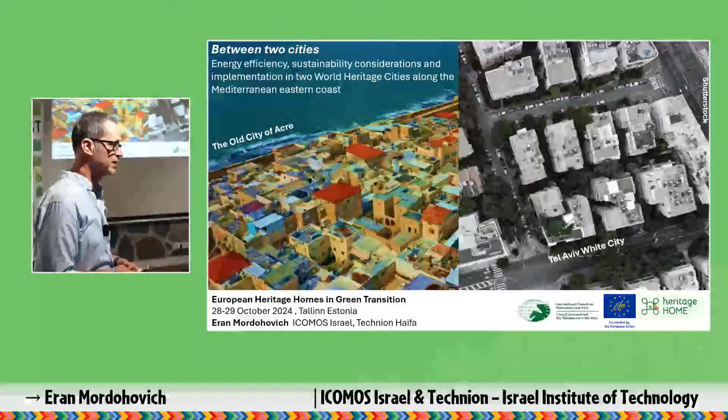I have to say I'm not an expert on climate, I'm an architect. During my work I'm working on archaeological sites and archaeological heritage management in the north of Israel, so normally it's not the consideration of climatic issues. But within my position, I'm also kind of representing this governmental organization. In the old city of Akko, we have a conservation committee because it's a World Heritage City. Part of the management plan of the city was to establish this committee, and I'm representing the interest of archaeology, but also dealing with heritage management in this city, which is very interesting, very difficult, very challenging.

And by that, the issue of, let's say, energy installations in a heritage city like Akko came up already to our committee, and then it started to get in my mind that we really need to address this issue before it becomes a concrete problem, because the dynamics in Israel in general, and particularly in Akko, is that people are doing what they think they need or want or should do. They don't wait for the authorities to authorize or give them permits. Sometimes they do, but mostly they just do.

And then I think in this kind of environment, we have to prepare, and we have to think what would be possible within this kind of question about installing, in this case, photovoltaic - you called it solar cells. But the title of the lecture is Energy Efficiency. So I learned something, it will come.

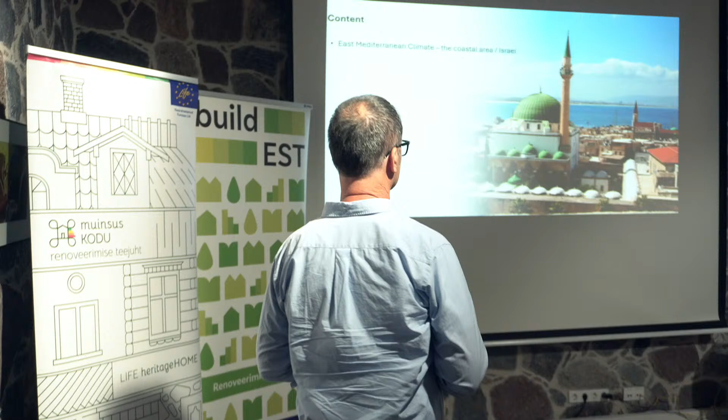So I will speak a little bit about our climate. What I will do, I took Akko as one example, and Tel Aviv. Both cities are on the coastline of the Mediterranean, and they are in many ways two extremes in terms of culture of building, in terms of social, demographic, economical structure. The difference is very big, but the climate is common, and we're talking about two completely different kinds of architecture. One is vernacular and the other one is modernist, both World Heritage cities. So I thought this comparison might be interesting.

So I will speak also a bit about Mediterranean vernacular architecture, present the old city of Akko and its climatic characteristics, the white city, its values, and talk a little bit about the climatic history of this kind of architecture. Then discuss a little about Tel Aviv, about Akko, about the challenges we have there, mostly about anticipation for photovoltaic panels, and then a little bit thinking about the future. I've learned a lot during the 2 days, so I tried to adjust my talk to what we have discussed, and I also have some points for discussion at the end, so I hope we can have some insights from you about the questions I have.

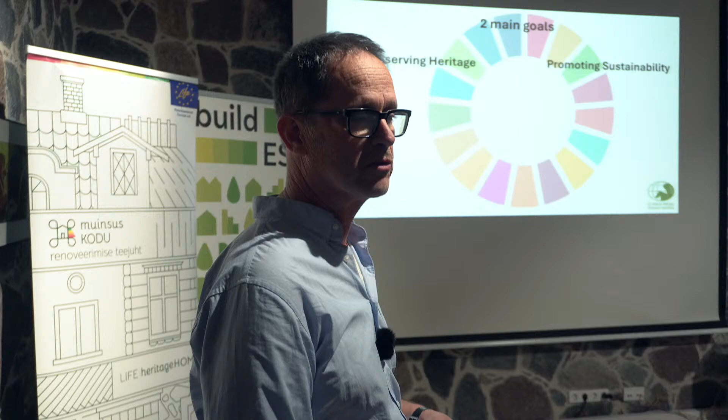In this audience, we don't need to speak too much about the conflict between preserving heritage and promoting sustainability. It's a kind of built-in conflict in many ways, but we understand it may also be possible. Maybe this conference is part of how to put those two together. It's part of the UN SDGs: affordable and clean energy, sustainable cities and communities, and climate action. So these three goals are at the core of this discussion.

A little bit about the climate we are talking about. We have been here in the northern area, and I'm talking about a completely different climate. Israel is in the Mediterranean, around the 30th latitude and a little bit above, until the 33rd latitude. So we are bordering desert climate already. Israel is a very small country, but it has quite varied climatic zones, from desert to semi-alpine in the north, coastal and subtropical.

But I'm going to talk about our climate: hot, dry summers, very long summers, and they are getting longer and longer, with mild, wet winters. Wet is almost wishful thinking, because they're getting drier and drier too. We have less rain in winter, and sometimes strong rains in the mid-seasons. But this is the basic weather we are dealing with: hot, dry summers, and on the coast, very humid. There is huge humidity coming from the Mediterranean, and that will affect the discussion.

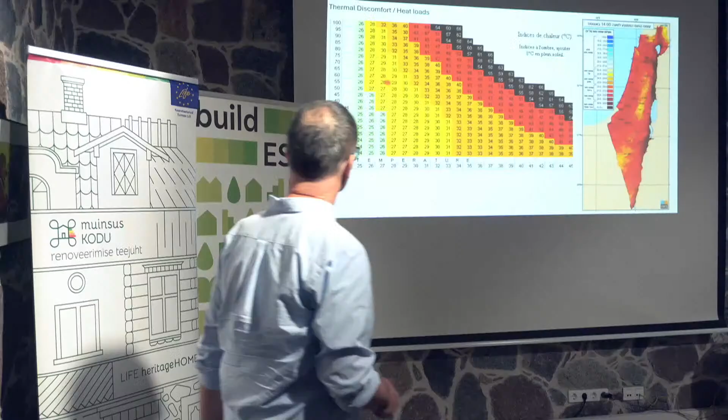So this is the thermal discomfort or heat load, which takes into consideration the temperatures and also the humidity, and this combination determines how comfortable you feel. In the range we're talking about, summers in Israel are already around 32, 33, 30 degrees, and on the coastline, the humidity is something around here. You can see the colors getting closer to orange and red, which means it's not an easy feeling.

This is one of the things vernacular architecture had to mitigate in the past, but also what do we do with that today, and how modernist architecture tried to mitigate it. And this is getting worse and worse.

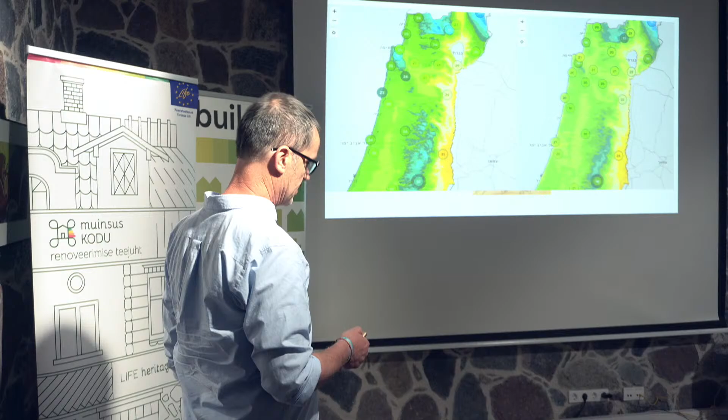Those are temperatures along the coast, so you can see - I think this is summer, this is winter average, and this is summer average. But for me, those numbers look a little bit low. I think they are much higher, for sure with humidity.

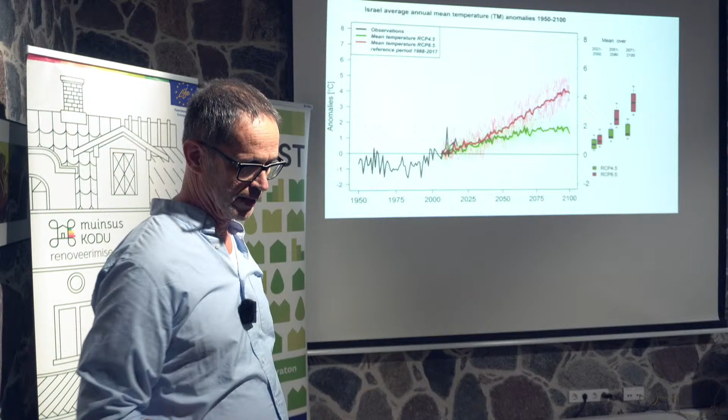This is the world, talking about what will happen in the next 70 to 80 years. So today we are somewhere here, and in the best scenario we're going to get to 2 degrees warmer in Israel, and in the worst scenarios, we're going to get to 4 degrees more than today, which means everything we feel is hard today will be much harder, and maybe sometimes unbearable.

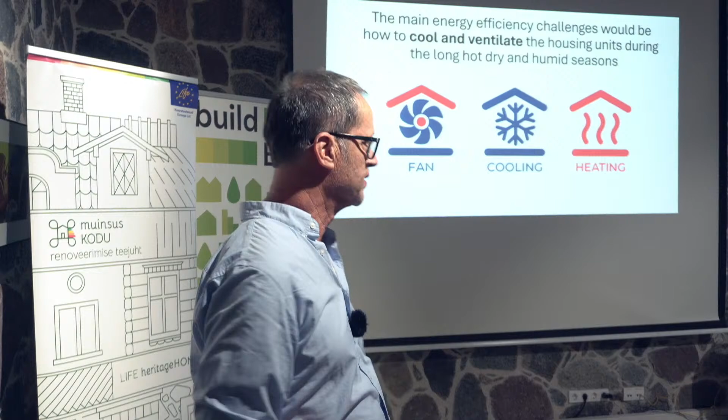So the main challenges we deal with in Israel, or in our region, are about cooling and ventilation. It was also very interesting to learn about this concerning your region. So it's about ventilation, cooling, and a little bit about heating, because, as I said, winters are becoming shorter and milder.

So this is actually the picture that we should try to mitigate. I accept your remark that it's not about cooling or heating—it's more about comfort.

A little bit about Mediterranean vernacular cities—referring to Akko, but also to many cities around the Mediterranean, mostly in the southern and eastern part, but also cities in southern Europe. It starts with a compact urban layout, which influences the climate within those cities and within the houses. First, urban structure: narrow streets and alleys, irregular patterns, so you don't have very big sun radiation in big streets, courtyards and patios, terrace buildings and streets, and structure adapted to social and religious traditions.

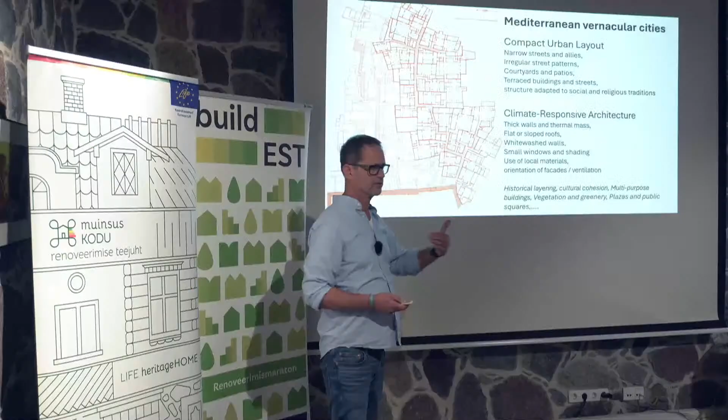So this is the idea that there is a certain level of moving from the public into the private. It goes well with the architecture and with the climate, but it also influences the urban layout.

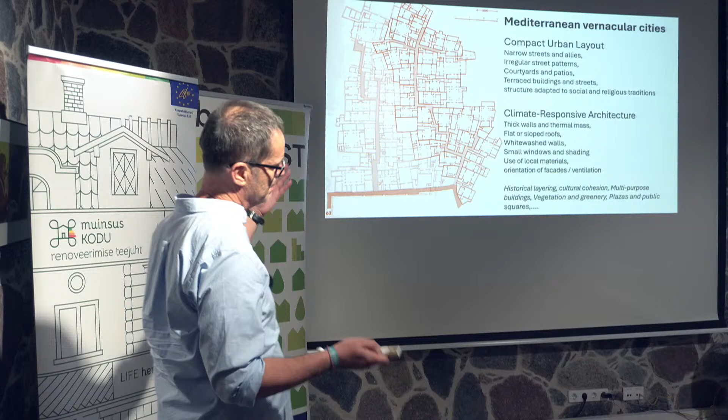And regarding climate and architecture, we have thick walls—this is also part of the way people used to build before they had other technologies. Flat or sloped roofs, but sloped roofs are more scarce. Whitewashed walls—they're not always truly white, but light colored. Small windows and shading, that's obvious. The use of local materials, which fit the climate, orientation of facades, and ventilation, which we talked about. There are many more things, but this isn't a lecture about vernacular Mediterranean cities.

But those things, I think, are part of the way we should look at the climate issue.

So the foundations of the city we know today, the old city, are actually from this period. Later on it was conquered by the Mamluks, by the Muslims, and was neglected and left for ruins for 300 years. Then in the middle of the 18th century, one of the local rulers rebuilt Akko because he understood the economic potential of this city as a port—it was the only natural port along the eastern coast of this country.

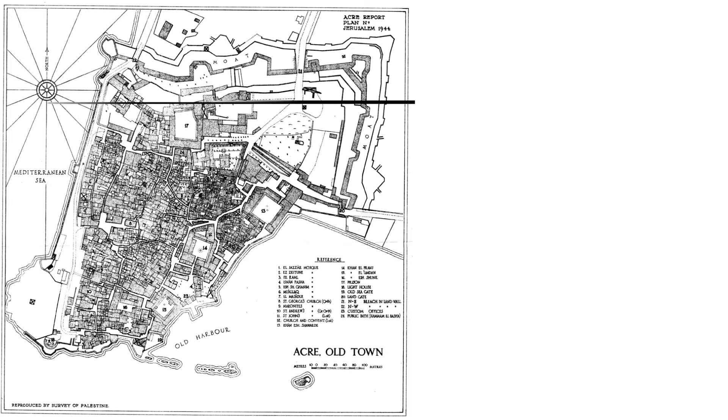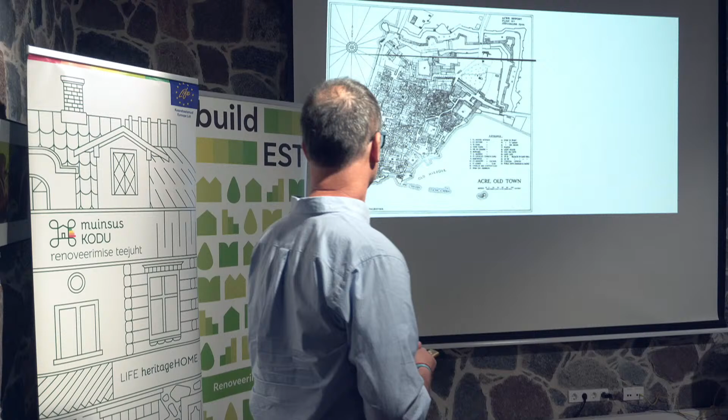It's actually a sandstone mixed with all kinds of shells and things, and it's a very porous stone, so it takes humidity in with salts, and if you don't let it evaporate, then the stones break from the crystals. Therefore we have this issue of breathing of the plasters and of the stones, and this is one of the things we have to explain to the local people today.

They are not masonry people, so they don't understand this logic, and they use cement, etc. What is interesting to see is the structure of the streets, which mainly go north-south. This north-south direction in our region is a very important feature in cooling down those main streets, because the sun mostly hits from the east and then from the west. At noon it's above, but it's easier to shade, so this orientation is very important, and it repeats afterwards.

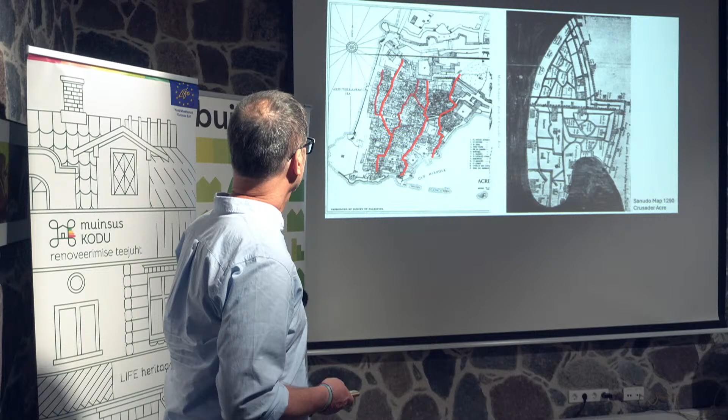Then we have a kind of typical living neighborhood, and you can see how many patios and inner squares there are, or there were. This is a British map from 1944, which was adopted. What is also interesting to see is that in the map of Sanudo, which is the first map we have from Akko, St. John the Acre, whatever name you want to call it, we can see that this structure of streets is still there from medieval times.

There are around 5,000 residents in the old city, and 95% of them are Arab Muslims. It's very important to say this because it also says a lot about the socio-economic status of those citizens and their ability to handle World Heritage demands, understanding those values, and investing in it. It's very low on the socio-economic grade scale in Israel, so it's 3 out of 10.

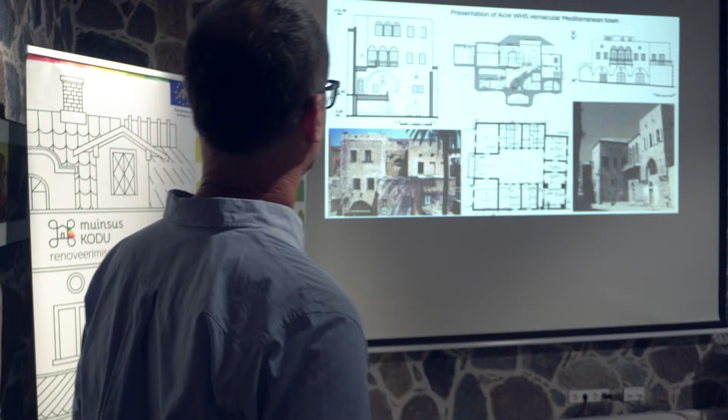I mention the electricity because it's all from the national grid, and there are a lot of illegal connections and improvisations done by the people themselves. So the reality is—I'll go back to it afterwards—there's a conflict between the residents and the government and the municipality, which is part of the discussion for me.

This is typical housing, or vernacular architecture, with living units built around an interior square, court, or space. We normally have a ground floor which is very high and vaulted, and in the past that used to be a courtyard. Then they closed it and put merchandise or animals on the lower floor, while the families lived on the upper floor, and sometimes there is a third floor.

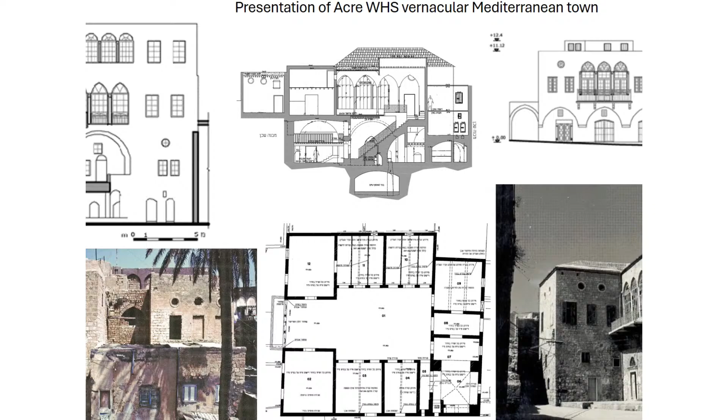So what can we say about climate challenges? First we have a division of high ceilings—high ceilings let the heat accumulate in the upper part and be ventilated out. But since 1948 there were a lot of Arab refugees moving to Akko, and there started to be a huge housing problem.

So instead of the air going up, people divided this one big high unit into two units, with a floor in between, and windows up and down. The big beautiful window that used to be there is now completely gone and blocked. So the whole circulation of air changes within this, and we see this phenomenon a lot in Akko.

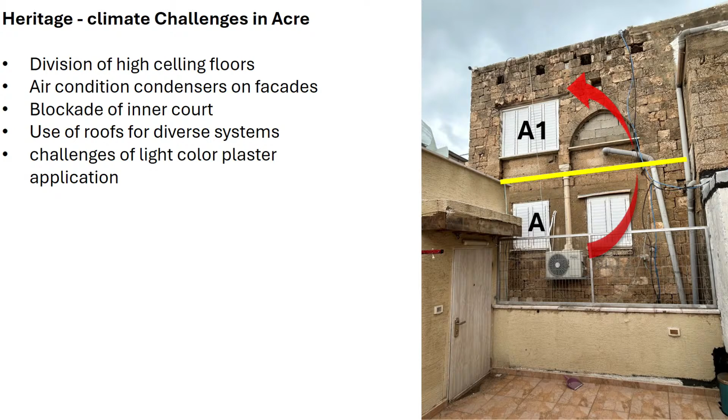So we have the air condition condenser on the facade. I have to say something—air conditioning is a must in a way, it's very difficult without it. I think we need to find ways to air condition or cool the houses.

It was mentioned today with green energy, energy that is not fossil. But it will be very difficult in Israel. Maybe you, as a tourist, went to those areas or worked there—it's very difficult in the 21st century to live without it. It's a fact, I think it's very difficult.

Coming from the subtropics, I know what you mean, but the problem is it heats as well—it's heating the public realm. Yeah.

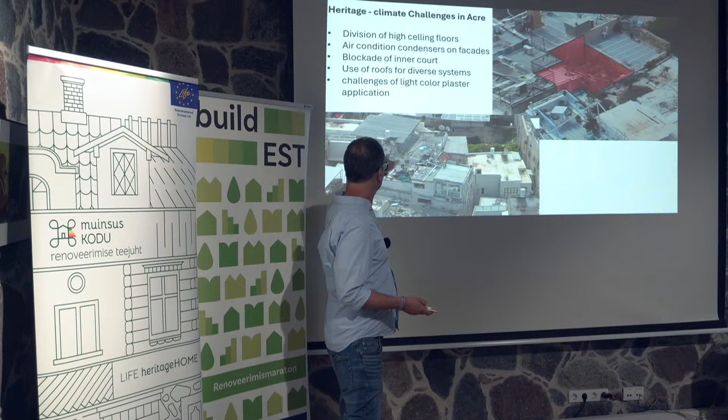The other thing we have to find is a way to deal with not just the energy we're using, but also the heating from these systems in tight urban environments. It's difficult. We have air condition condensers which are disturbing, and inner courtyards which were blocked with all kinds of agglomerating and extending of small apartments. The roofs are being used for many things: garbage, boilers, condensers, whatever. We'll speak about it later.

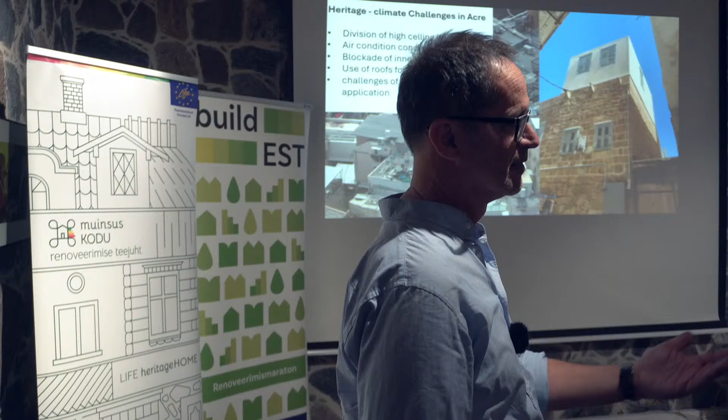And also the question of the plaster. In the past, Akko used to be a plastered city, rendered with lime plaster. But today almost none of the houses in Akko are plastered. This is an addition we let them do, but we force them to plaster because it's made out of light materials, so we don't want to see those materials, and we're allowed to do it because of the weight. But the buildings aren't plastered because plaster needs maintenance, and maintenance isn't something that's done, at least in our region. The physical conditions with the salt and the lime aren't always suitable, so it's very difficult to find a good render. If they render, they put cement inside, and we know what's the problem - it doesn't breathe. So we prefer to have the stone breathing than to have cement plaster.

I jumped to Tel Aviv, again a World Heritage City, but from a completely different period. It's a modernist city on the Mediterranean coast, about 150 kilometers south of Akko. It started as a neighborhood outside of Jaffa. Jaffa was a city with a small port, one of the main ports, and it was mainly an Arab city. Tel Aviv started as a neighborhood, and then it developed - it started in 1909, so it's a bit more than 100 years old. But Jaffa is again 6,000 years old.

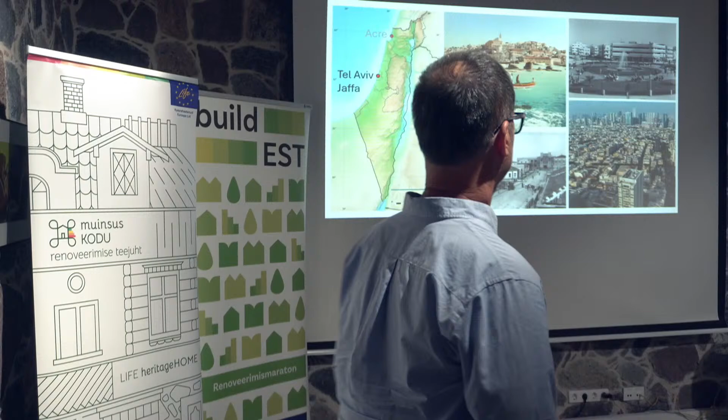Then in the 30s, with very big immigration from Europe of Jews, it grew and became really the powerhouse of Palestine at that time. They say it's the first Jewish city, the first Hebrew city. Today it's a city of almost 500,000 people, but it's in the middle of a metropolis of about 2.5 million people. Economically and culturally, that's the capital of Israel, not Jerusalem, as many European countries think.

This ugly building, or not so beautiful building, is where the Estonian embassy is located. Therefore I put it in. And actually, from inside, you have a very nice view of the white city of Tel Aviv, the World Heritage Site, and the sea. So I wanted to give the Estonians a little bit of information if they come to Tel Aviv - that's where your embassy is.

You can see quite nicely how Tel Aviv, the white city, which is a protected area, is being surrounded by towers. In the beginning, when Jewish architects came to Palestine at the turn of the 20th century, they tried to look for, let's call it, Jewish architecture which resembles the Jewishness, but also tried to get ideas about how to build in the Mediterranean, Middle East climate-wise.

So they used all kinds of features taken from local craftsmen and local architecture. Those upper buildings are not from Tel Aviv, but I brought them because of the architect - this is the first building of the Technion, where Ruth and I are teaching, but it's now the National Science Museum. The houses below are houses in Tel Aviv built in the early 20s or a bit before, in a very eclectic style, when Jewish architects tried to search their way to what is suitable for the Mediterranean climate, but also for the new nation building itself.

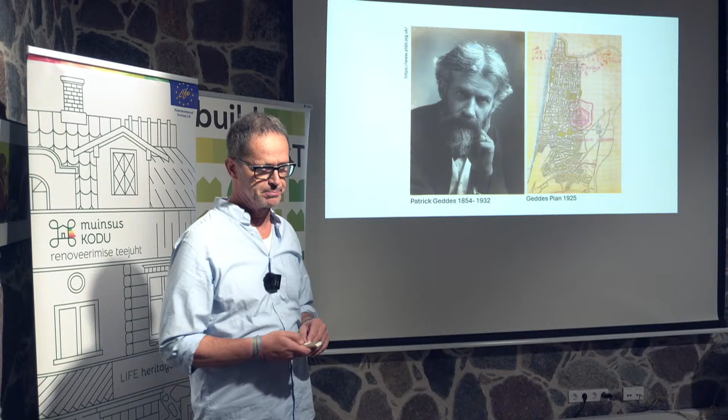At that point, in the early 20s, Patrick Geddes comes into the picture. Patrick Geddes, a Scottish botanist and biologist, had a lot of influence on urbanism. At that time, he came with ideas from the Garden City, and he had his own ideas. Geddes was appointed by the Jews - he came to Palestine from the 20s, and he advised Jerusalem and Haifa, but Tel Aviv invited him to do this plan, which, as I read, is the only plan of Geddes that was really implemented at such a scale. His plan is actually, until today, the core of historic Tel Aviv.

But Ruth is here, and she's much more expert on Geddes than me, if she would like to add.

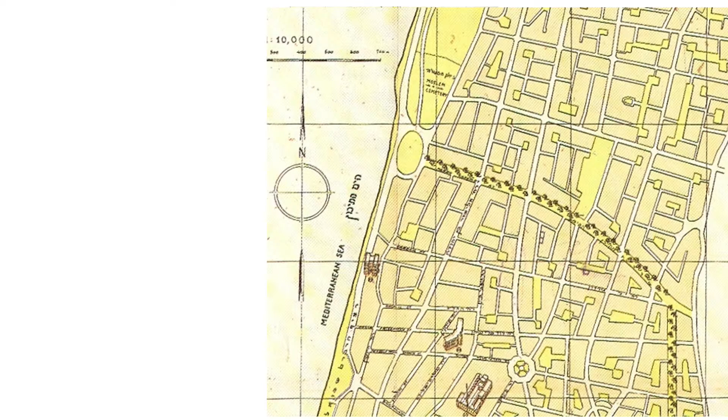This is a Geddes plan that started to develop. The ideas were very clear, with building blocks and green areas inside the block gardens, and the direction of the street. But the municipality of Tel Aviv later, due to pressures to build and densify, have changed it. But the basics are actually there, and Geddes has taken also the direction of the northwest winds, which are the typical cooler winds in the summer, as a kind of direction for the street.

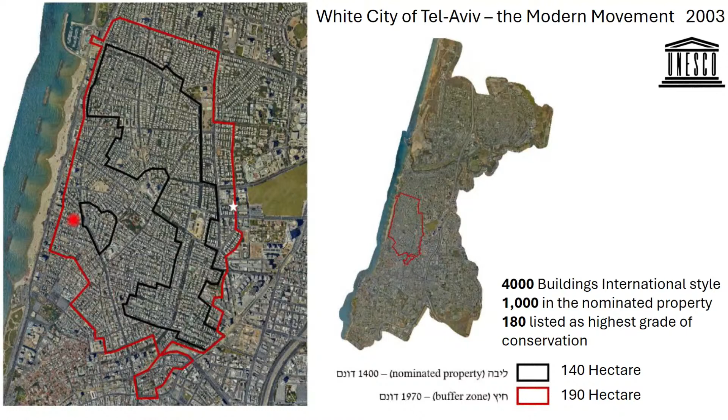A little bit about the World Heritage Site. This red area is the buffer zone of the White City, declared in 2003, one of the first Israeli sites. The black is the declared area with this kind of enclave here. So we have about 4,000 buildings within this area in Tel Aviv of the international style. 1,000 of them are in the nominated zone, the black one, and only 180 of them are listed with the highest grade regarding conservation.

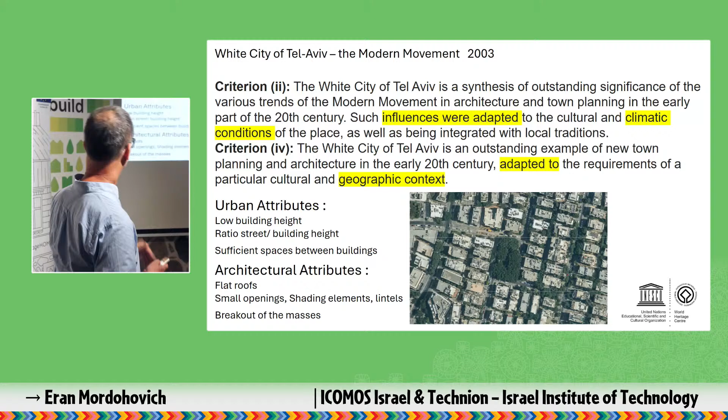Also in Tel Aviv, the criteria were referring to climatic adaptation. They said that influences were adapted to climatic conditions of the place, and also the architecture of the early 20th century adapted to the requirements of the particular geographic context. We can see that by the initial thought about low building height, the ratio of the street and building height, and sufficient space between the buildings to allow ventilation. We have also flat roofs and small openings, shading elements, lintels from the south to shade, and the breakout of the mass, which is also climatic, but it comes also from the ideology.

Some of the buildings as they were in the 30s mostly and 40s. This is one of the Vogue covers with this iconic building, so the whole architecture was very iconic and became also kind of hip, for sure for the Tel Avivians, but Israelis too, and also in the world. Tel Aviv, until the wars that we are having now, was quite an interesting destination for clubbers, gays, and tourists, architecture tourists also.

There's some pictures of the buildings as they are today, some with additions. I will talk about the additions, but those are not with additions. The White City was actually, a new style was created there for modernism, influenced by other modernists like Le Corbusier, like the Bauhaus school. You should know that most people call Tel Aviv the Bauhaus city, but it was not built only, or mostly not, by Bauhaus graduates. But that's a common mistake. It's already branding of the city, so it's hard to resist it.

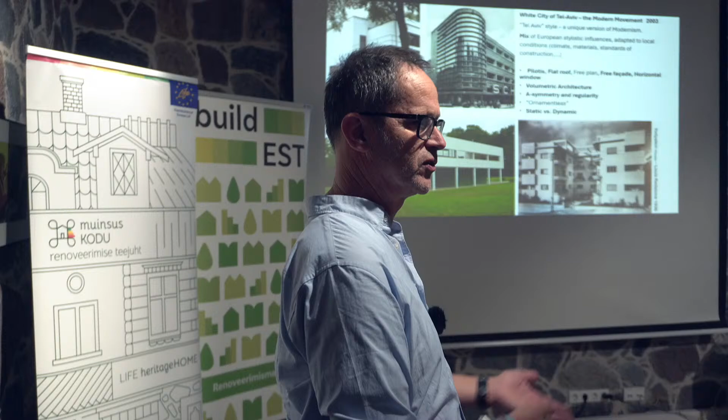Also the principles of Gropius from the Bauhaus, Mendelsohn with the rounded balconies, and Le Corbusier with the ideas of the five principles. Some of them also have influence on the climatic things. But finally, the architects were Jewish who immigrated from Europe. They came with European education, came to Palestine, and took from all those influences, but also referred to the climate. So you can see this building is kind of an eclectic modernism from all those influences.

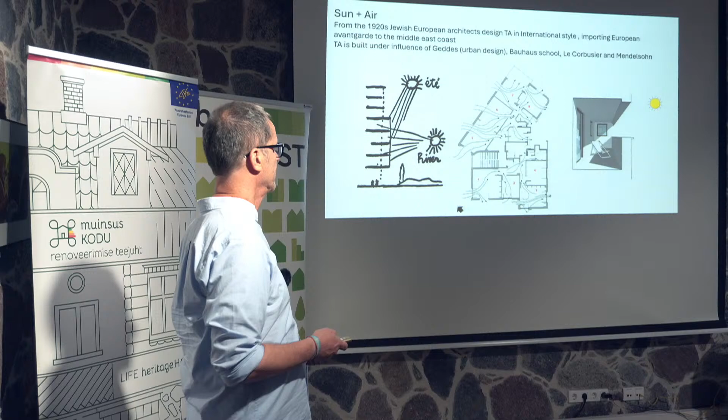They were also busy with the ideas of Le Corbusier, with radiation and sun, ventilation schemes, how a building should be ventilated and how the facade should be shaded, and a lot of ideas from Le Corbusier about windows, the horizontal windows became horizontal balconies in Palestine. But the problem was that they used new materials and not the old materials, and they covered them with plaster, but the walls were thin and the roofs were thin, and the windows were glazed in a poor way. So that's what all those things, and they used concrete a lot of times, also bricks, but bricks from the local ones, or lime bricks, which is silicate. It's a material which was used.

But the thing was that radiation was penetrating the buildings, and there was not enough thermal mass like in the traditional buildings. And that created quite difficult conditions.

What happened also was that the whole plan was densified, the buildings became higher, and the wrong orientation of some of the blocks meant half of them were not oriented to the wind, but on the opposite side. And Wittkower, I bring him again, another German Jewish architect who came to Palestine in the 30s.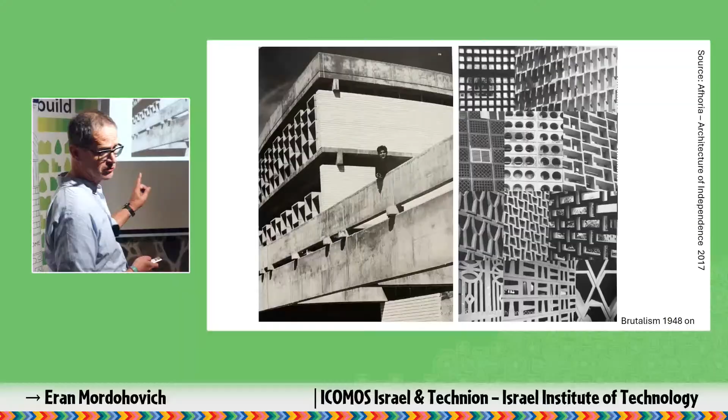We didn't have air conditioning at that time in Israel, so we are still before the air-conditioning era.

In Tel Aviv, we have layer-2 additions on the heritage buildings. That's a policy which already existed in Tel Aviv before the World Heritage nomination, and it depends on which building and its definition in the conservation plan. But Tel Aviv is very liberal with additions on modernist buildings.

You can see here some additions. Some of them are done, in my view, very nicely, respecting the original modernist principles, while others are different—but on the eclectic buildings, they look really eclectic. So at least eclecticism is continuing.

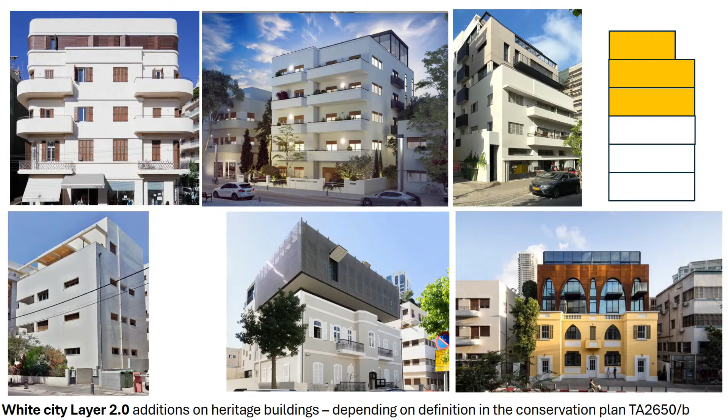The idea is that if you have three levels, you can add another two and a half, and the reason for it is money. If a contractor or developer is building two more levels, he can renovate the lower floors, conserve them, and make them nice again. But it's a profit—that's an important point.

This is one typical cycle a building like this went through, from 1935 onward. You can see people used to close the balconies and start installing air conditioners on the fronts and all kinds of things on the roof. Then in 2002, Baro and Gazit did another addition of two levels, plus 2.5 levels. That's a sort of standard practice.

So if we compare the 20s and 30s to today, urban changes are very big, and traffic is so much heavier now. The idea of people opening their windows and sitting on balconies isn't sustainable anymore for people in many ways. It's not that they don't use it, but the conditions are very different.

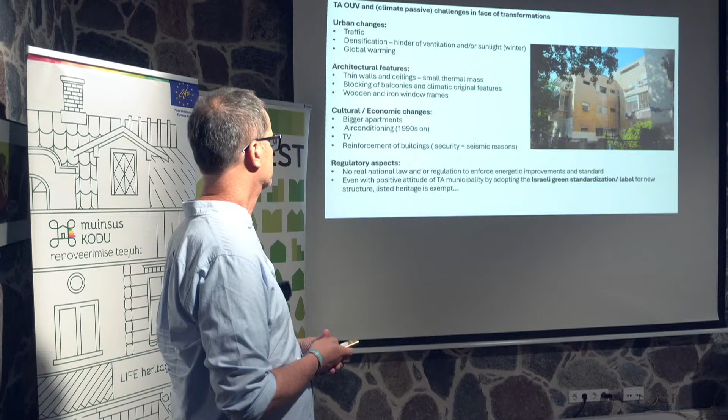Densification, as I said, and global warming mean temperatures are higher, and those buildings aren't fitted for this kind of temperature—I mean the original ones, with thin walls and ceilings, as I mentioned.

Today people want bigger apartments, and we're talking again about air conditioning from the 90s onward—it became a standard for sure in Tel Aviv. I wrote 'television' because people don't sit on balconies anymore, they watch television.

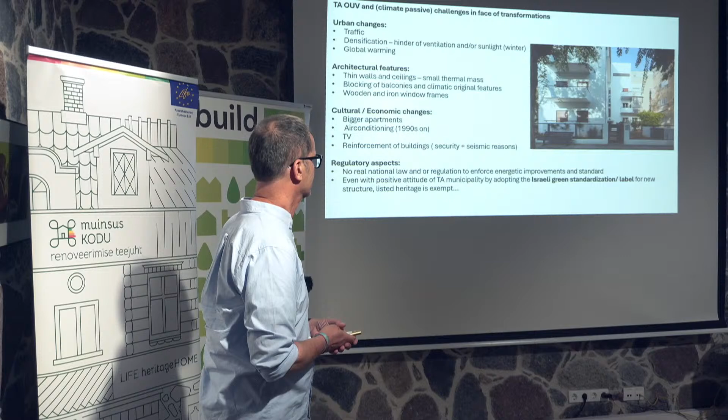Reinforcement of buildings is needed for security reasons, but also for seismic reasons. These kinds of additions also promote shelter rooms in each apartment, and also reinforce the building seismically—we are in a seismic area in Israel. There is no law about green standardization yet, but I'll speak about it in the short time I have.

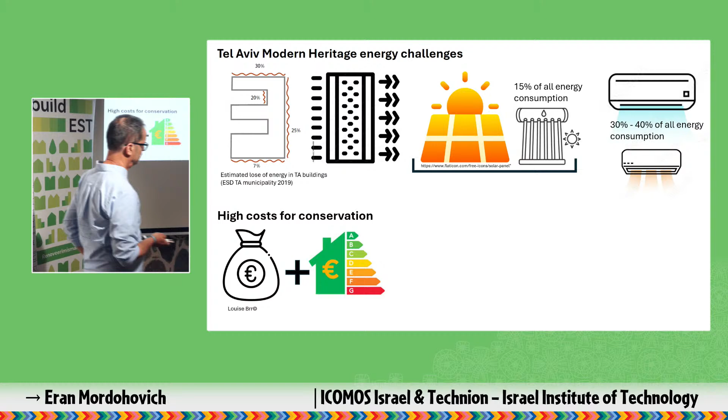If we understand that radiation from the facades, windows and roof gives us about 75% of the exposure and the way energy gets away, that's something to deal with. On the roof we have facilities for warming water, and now the question of photovoltaic panels. We also know that air conditioning, and a little heating, but mostly air conditioning, is 30% to 40% of the energy consumption for an average household. So the cost for conservation is high. Conservation in Tel Aviv is very costly, and it's very difficult to impose the energy efficiency regulations and so on.

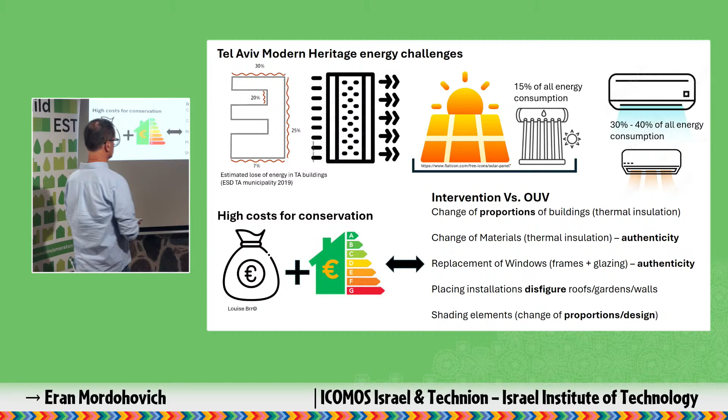The thing is that when you have to put outside thermal insulation, it will change the proportions of the buildings, and the proportions of the building are part of the value. It also involves the change of materials, for example the windows and the plaster, replacement of the window frames, and it's also a matter of losing authenticity. Also, those installations disfigure the roofs, the gardens, or even the walls. So this is also a hindrance. And shading elements, modern ones, also change the values.

Tel Aviv municipality did try to deal with this, they call it green conservation. They updated it last year with advice for people on what to do. We also have the green renovation manual, which is governmental, from the Ministry of Environmental Protection. They mostly recommend insulating better.

Having the walls lighter, insulating, using the floors as thermal mass, re-establishing the ventilation, the original ventilation elements, and replacing the windows with more insulating systems. Normally the windows are wood, and it's difficult to put in double glazing unless you use very specific systems. Introducing shaders, installing sun screening coating on some of the windows which are not on the street front, and improving the AC installation efficiency. So always improving, having a higher level of energy efficiency.

We have a norm, actually from 2023, which became kind of the standard for new buildings, but it's not implemented so much on heritage buildings unless it's voluntary. In Tel Aviv, they already adopted the norm in 2013, but they don't apply it to heritage buildings, and that's because of what I've shown before.

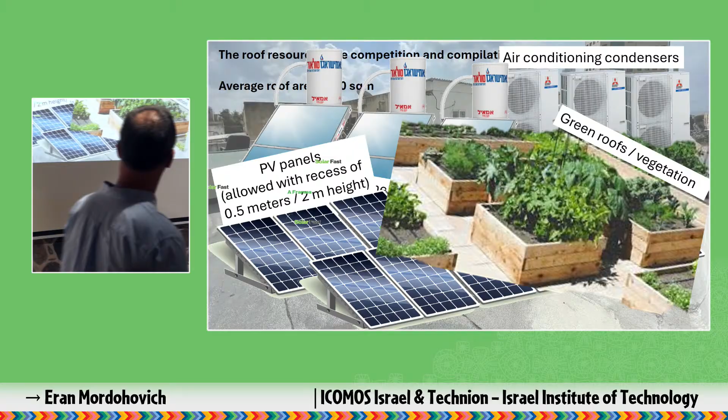We have the roofs of Tel Aviv, and the big thing is it's not a very big roof, 200 square meters for 6 to 8 or 10 apartments. Then you have the air conditioners, which we want to put on the roof. We also want to put the sun boilers, which are compulsory and mandatory in Israel to put on the roofs, so each apartment needs one. Then we also want to put the photovoltaic panels, and we want to have a green roof, some green in the city, and also a social place, a meeting place for the tenants. So everything has to be on those roofs, and this is impossible. This is not realistic, and therefore compromises have to be made.

About the layer 2 thing, I think it can improve because it's insulating the old roofs by building on top of it. It also improves the replacement of all systems within the older building, and it's also possible to create more custom roofs for energy installations which are more effective. Another aspect of sustainability is that you're adding new life to the city without demolishing buildings. So it's maybe not a wonderful solution, but it can still contribute.

A little bit about Akko. I go back to Akko, to the vernacular and the question of photovoltaic panels. Some of the people who were in Visby know this basically. I've looked at other roofs in Mediterranean World Heritage cities, like in Morocco, Tunis. Something closer to us is Rhodos, which is a little bit more like Akko.

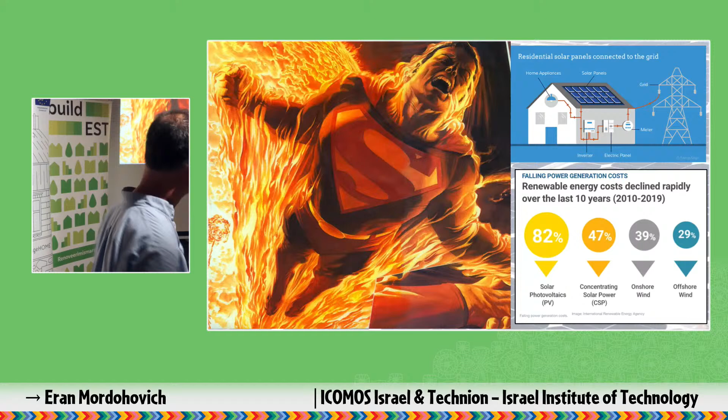So solar is the Superman of green energy. I know it's not, but let's assume it's all clean product, and after 20 years it's dismantled and used as tents or something.

I think we have to mitigate this issue. We cannot just say no to solar panels in the old city of Akko, because it doesn't work like that over there. People tend to do things if they think it's good for them, worth it, and affordable, and therefore they will do it.

If we had roofs like that in 1918, very plain with nothing on them, it starts to change in the 50s, and then came the television antenna and the sun boilers. In the 60s it also became more common, and from the 70s, because of the oil crisis of 1974 - the oil embargo - it was a catalyst for sun boilers to become obligatory in Israel. So every house has to have a sun boiler unless it's higher than 6 floors or something like that. But it saves a lot of electricity, and so it became part of the roofscape of many Israeli cities. It's efficient.

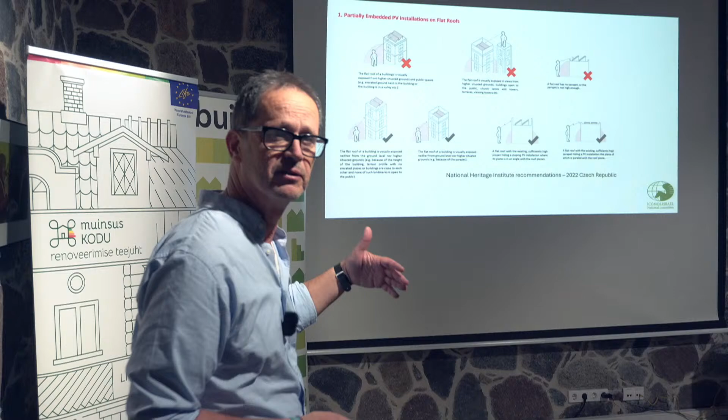I brought a manual from the National Heritage Institute in the Czech Republic, which tries to address this idea of where it's possible to put solar panels. It was kind of illustrative, but I'm not sure it works for us.

I did try to take a typical roofscape of Akko with all the mess and think about what happens if we use flat panels, not the ones with the metal structure, but more advanced ones, and put them on the roofs - what influence it would have. Maybe the colors can be different too, because today you can have them in different colors.

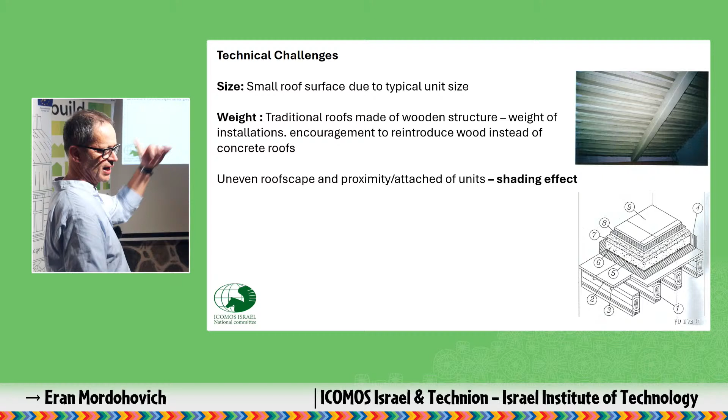But we have a lot of technical issues. The original roofs were made of wood, and we tried to implement more wooden roofs instead of concrete, because concrete isn't good. We have small roofs because of the size of the units, and weight is an issue. The traditional roofs are made from wood normally, very simple, and adding structures on top of the roof might be a problem. We also have the shading effect of uneven buildings, so a lot of roofs are covered in shade, making them inefficient.

People will also have difficulty accessing the roof for installation and maintenance, which is a problem. And there's a small parapet on the roofs, which would require flat panels - and flat panels mean less efficiency.

We also have regulatory issues. As I said, enforcement is very weak in the city, so even if we agree on a good visual solution, it probably won't be implemented. And there's no obligation to do it.

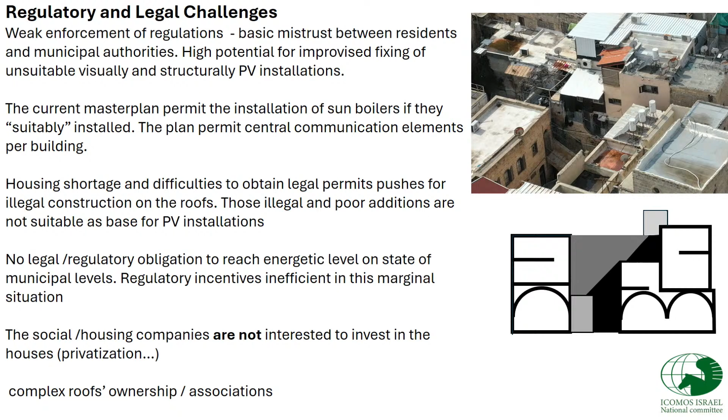There's also a very complex structure of units - few units, and the roof belongs to them all. So how do you manage that? It will cause a lot of fights. Also, most of the houses belong to housing associations or the government, which is only interested in selling them, not investing in them. So for sure they will not go for solar panels.

There are advantages because now we can have smaller panels, integrated elements, maybe, let's say, shades on the roofs.

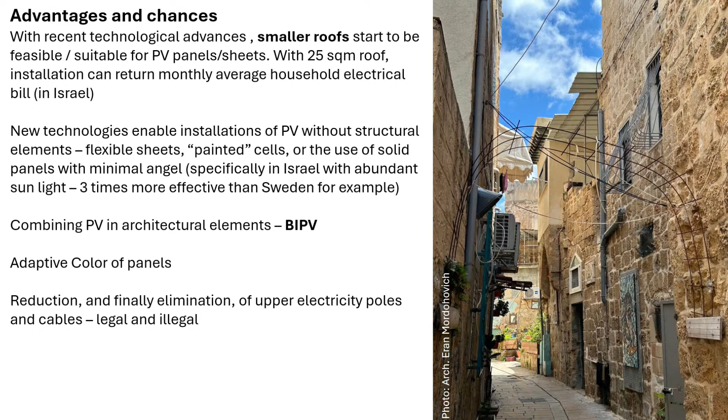We can make them maybe adaptive to the color. And if everybody has it, then we'll have much less wires and poles. So it has also this kind of effect. And we have also the microgrid element, I will speak about it.

So that's a problem. We know that if we ask people to do it like that, they will do the cheapest and easiest one, maybe not the more efficient ones, which is bad. And also they will put it everywhere to get more electricity. So maybe shades like that, which we permit to do with solar elements, can work.

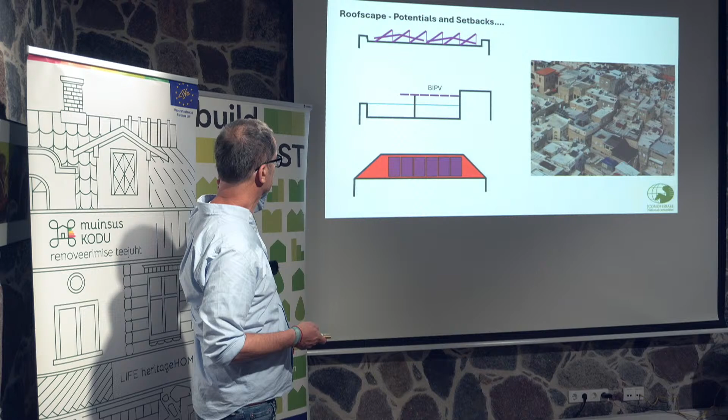So all those questions bring me to the conclusion about Akko. I think it needs to have some investigation. I don't think we can say - I think we have to be prepared for this kind of change, but it has to be investigated and maybe find recommendations, but we should do it now.

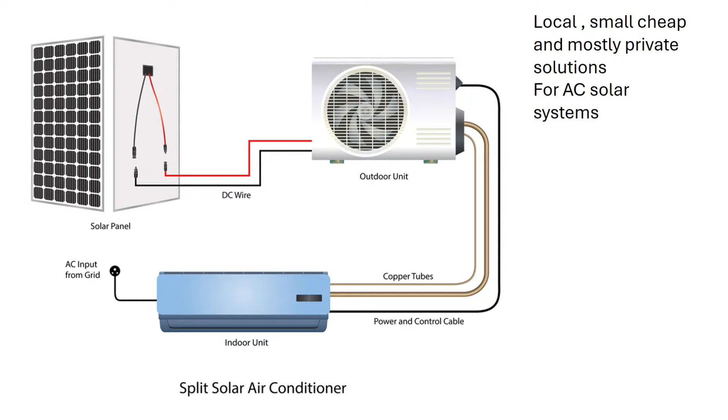So they get their electricity in the day from the sun panel. This is not the ones I think are fit to Akko, but they are developed, and in India you have many of them. It's a kind of quite minimal solution to have, and then in the evening you plug it to the AC. So it's combined, it's a hybrid.

But the problem that we have normally in households is we have more than one unit, so we will need a few of them on the roof. But maybe it's a sort of solution for how to get the energy for the air conditioning.

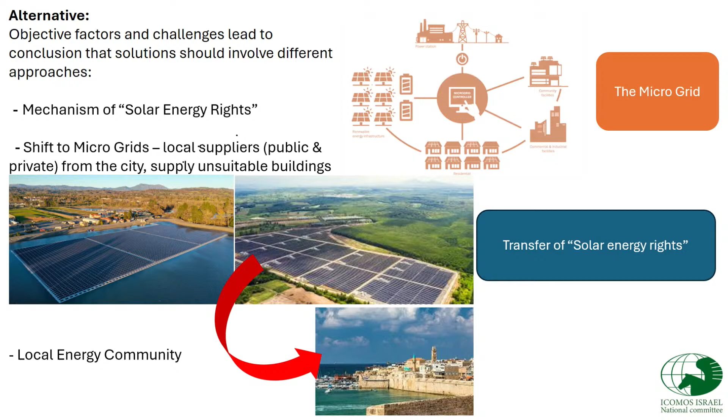What I call the alternative is to have solar energy rights. It means that in cities like Akko, a World Heritage city, or cities where we cannot have them for many reasons, maybe we can produce electricity in a central place, the city or the government, and give those people who live in Akko, who are not in a good economic situation, the ability to have those sun rights instead of installing panels for each family.

And then the creation of microgrid is also very important in our... I brought this for the main conclusion from the Israeli Council for Green Building. They write on their webpage the reasons why someone should do a green building - why is it worth it for me. So the question is, what's good for me, not for the big global warming issue, and how much it saves on expenses. I think that's maybe part of the solutions.

And I have a few points for discussion, maybe we can do it together afterward. Is it top-down initiatives or bottom-up processes? From the experience of Akko, I think it's quite interesting, because when people have economic motivation to do it, maybe that's the way to go forward. And then, how flexible are the authorities to have those kinds of changes and modifications?

And the last thing is about those energy banks - how can we create a communal solar or renewable energy bank, and in that way have compensation for people who cannot have it themselves, but encourage them to use green energy and have the economic benefit from that. So this is it, thank you. I'm sorry I'm over the time.

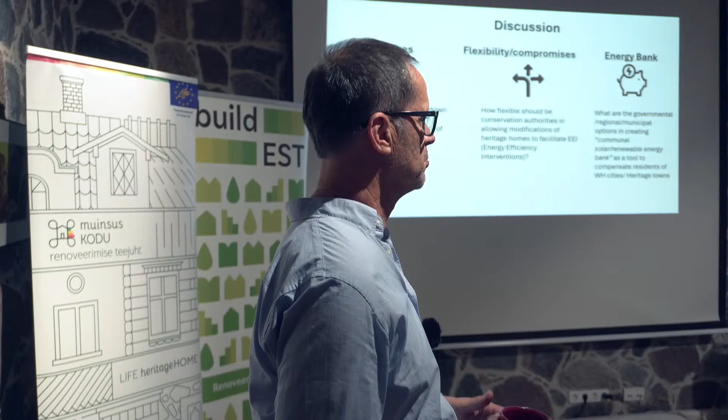I don't know if it's tied to lack of maintenance, or perhaps to a more consumerist mindset where we can replace things and don't need to deal with maintenance as much. Maintenance is a huge factor, for sure, when people don't have money and the state doesn't give them incentives or reduction or support. So maintenance is also a matter of culture. We have other problems, the building is not there, so they say it doesn't belong to us anyway. So it's ownership also in this case. But maintenance is a huge problem.

If maintenance was something more predictable and common, the roofs you've seen would have looked different, and also the facades and the windows. They put up blinds but never paint them, so finally they fall apart with the salt and the sun.

But it's still funny that even in earlier days, people were conscious of resource efficiency, you didn't want to waste anything. It's still somewhat the same situation, but we're not maintaining what we already have. We're letting it decay, not understanding the passive function of simple things like blinds, verandas, rendering. I think it's a very interesting correlation.

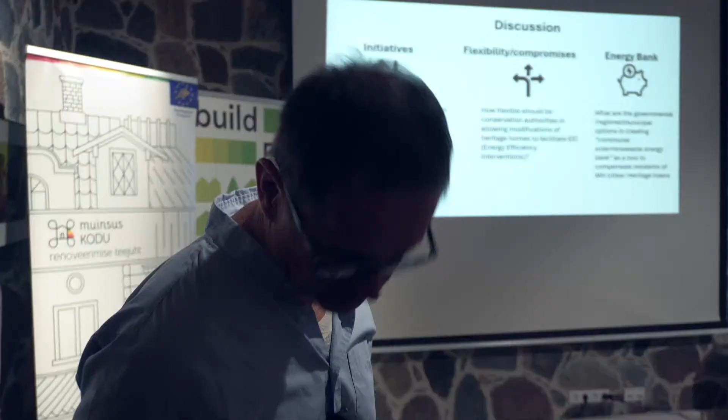I'm talking about someone else's work. I mentioned yesterday there's a wonderful young architect, Narika, from Jodhpur in India, doing her PhD in Edinburgh at the moment. She was talking about the maintenance of Jodhpur, which they do collectively every year, a blue wash which they say is really good for health as well. The whole community works on that, and they say that is what bonds their community, which is perhaps finding ways that it becomes a positive.

As a bit of Estonian context, we have a calendar day for this sort of thing. In the Estonian climate it's very different, but we have a specific day when we install winter frames into our windows, and retighten the lateral grooves in our log walls. It's called Mihklipäev, and that is the main point in the calendar when you're supposed to do these small regular improvements to your boundary surfaces and structures in preparation for the colder months, to raise the energy performance of the building.

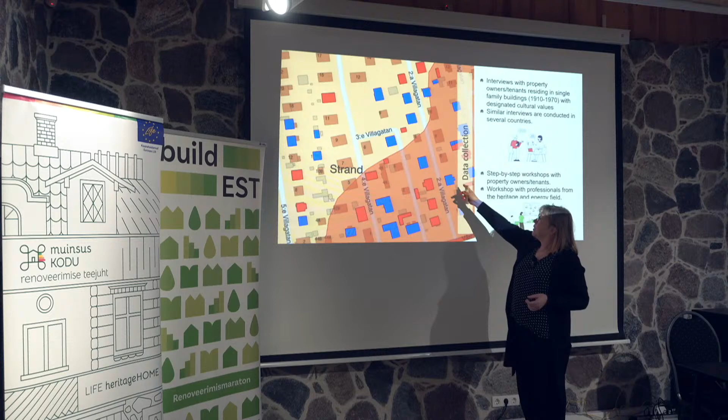This part of the built environment is of specific interest, but you can also see the different dots, the red and the blue ones. The red ones are the highest, the buildings with the highest interest, and the blue is middle interest. So in these areas we went out, we talked to people, we put posters in their post boxes, and we used this snowballing method to gather the interviewees.

UCL have also done these kinds of studies in other countries - in UK, Mexico, Turkey, Greece, for example. So we used the same interview scheme as the one used in other countries, but we needed to make some national changes, so the people we interviewed could understand the questions, while keeping it as similar as possible.

And then we also conducted step-by-step workshops in these areas. We had three areas that we investigated more thoroughly, and we had three workshops, and there we invited people to come and discuss energy efficiency in relation to what values they appreciated in their buildings. Then we had material that would be more general than the ordinary interviews. And we also had workshops with professionals from the heritage and energy field to see the authority perspective.

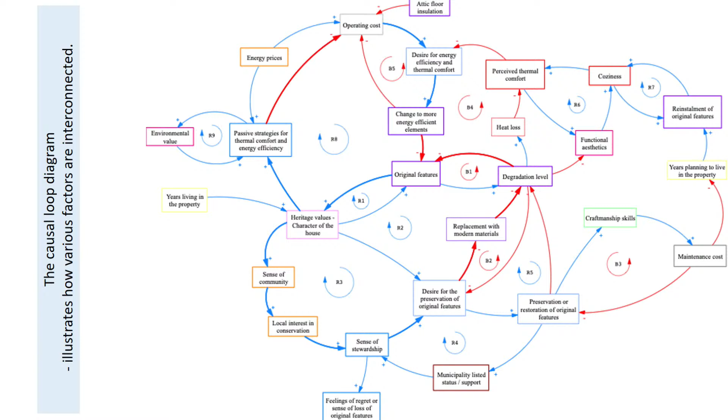Here you see one connection with a red arrow, and that is a negative connection. So you have here the preservation and restoration of original features, something many people want to do with their houses. But then you need craftsman skills, which can be difficult to find, and there are costs connected to this. So this connection is like a negative loop, and maybe this is something you need to address in order to get people to take the step to hire a craftsman or do something. Maybe it's knowledge, that they don't know the real cost, it's just something they think about.

So this is the way we have dealt with the material. Some summary from this, because the causal loop is messy. We can see that homeowners appreciate heritage values connected to time. The longer people have lived in their building, the more they appreciate values connected to cultural or heritage values.

There is a time perspective in how you appreciate values. Also the qualities of the house, the values and characteristics, were crucial for decisions regarding moving or buying a house. We could also see that the place itself was really important, that this area had heritage buildings was a big part in deciding to move there and buy the house.

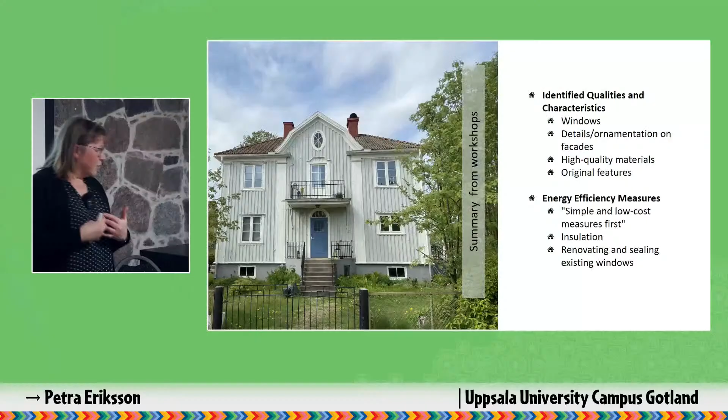In this workshop, the identified qualities and characteristics were, of course, the windows - always the windows. They also thought if a building had ornamentations and details in the facade, that was really important. They also appreciated high quality materials, and original features were also important. As for energy efficiency measures, they thought simple and low cost measures that you do first, and almost everyone agreed on that, except for some people who wanted to do more deep renovation, but they were fewer.

Insulation was talked about in different ways, and since it was a workshop, we didn't have time to go in depth into what they actually meant by that. They also talked about renovating and sealing existing windows, of course. So what we hear advisors saying - energy advisors and so on - is actually also thought about by the house owners.

We asked what they regretted if they had made any changes to the buildings. Here are some quotes: 'We read about the energy savings from window replacement, but then I saw the price and I regretted considering it. We also lost the charm of the old windows.' 'We installed solar heating on the roof, but we didn't think it had much effect. It was expensive, and we don't feel it paid off.' That was also something said about things they regretted.

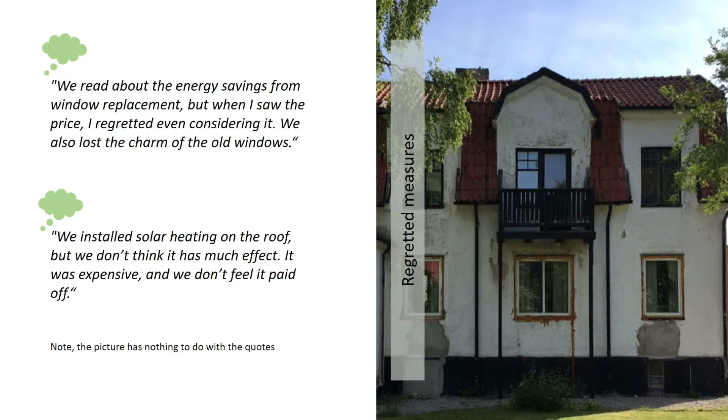What they thought was successful: choosing to renovate the windows instead of replacing them was the best decision we made. We kept the house's original character while also improving energy efficiency.

So there are also the windows - windows was on top of everything. The ground source heat pump was an expensive investment, but it is probably the best thing we have done for the house. It heats up perfectly, and our energy bill is halved.

So that is also something that came up. And in Sweden, air-to-air heat pump is, I guess, a profitable business to be in, because we can see that this is installed almost everywhere. This is also used for heat and for cooling in the summer, of course.

They also said something about what could be more sustainable measures that they had done, so like in the long term. Here are some quotes: When we think about renovations, we always consider what's best for the house in the long run. It's not just about money, it's about preserving what makes the house unique. We always try to find solutions that both save energy and preserve the house's essence. Sometimes it costs more, but it's worth it in the long run.

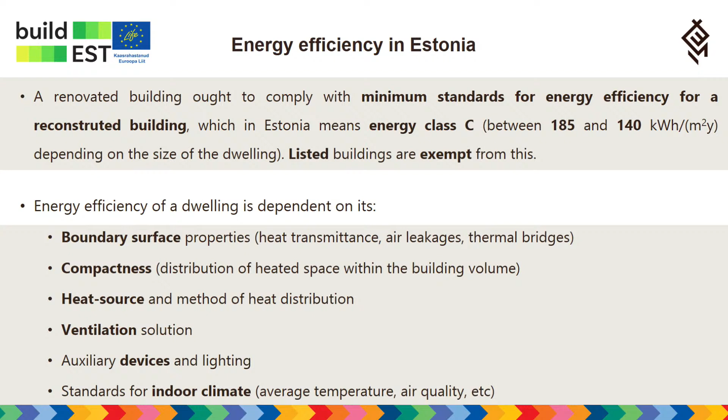We have its boundary surface properties, which affect its heat transmissions, air leakage, and thermal bridging. Its compactness - how the heated space is placed within the building volume. Is it placed all around the massing, or is it all clumped together?

The type of heat source, how efficient it is. Its ventilation solution - is there a ventilation solution? Is the ventilation solution mechanical or natural?

What types of auxiliary devices and lighting the building uses, how many of the devices are used and how efficient they are, and what standards for indoor climate have we established?

Are we satisfied with, let's say, 15 degrees as an indoor temperature during the winter months, or do we require higher standards for this? This also applies in terms of air exchange.

So what can we do to improve the energy efficiency of a building? We can upgrade its boundary surface properties, meaning we can insulate them and reduce air leakages. We can upgrade the heating system, applying more efficient or more environmentally friendly heat sources and more efficient methods of heat distribution.

For ventilation, we can apply a ventilation system with heat recovery, because if we need to reduce air leakages, that means any form of natural ventilation needs to be switched off, and all ventilation needs to be done mechanically. But that also gives us the opportunity to use heat recovery.

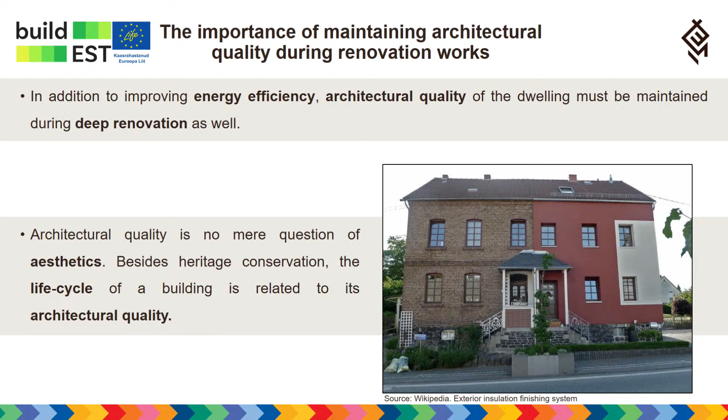So I would argue that if a renovation project begins by replacing historical details and materials with relatively cheap modern products, ignoring structural issues or using improper repair techniques, sure, the renovation solutions might be fine for 20 to 30 years, but after that, the renovation will need to be renovated again. And the negative scenario is that when you're looking at the building, everything original has been lost.

The building doesn't really look that good anymore. There's a lot of structural issues. And in the end, the worst scenario is when the homeowner starts to question why they should renovate this building, and when the real estate value of the plot is more profitable without the building than with it, which means the owner is more motivated to demolish it and sell a clear plot to a developer or homeowner who would like to build a new home on the plot, rather than renovating it. This means that improper renovation, where the building loses its architectural character, has an impact on the life cycle of the building, which has an impact on the carbon footprint of the building as well.

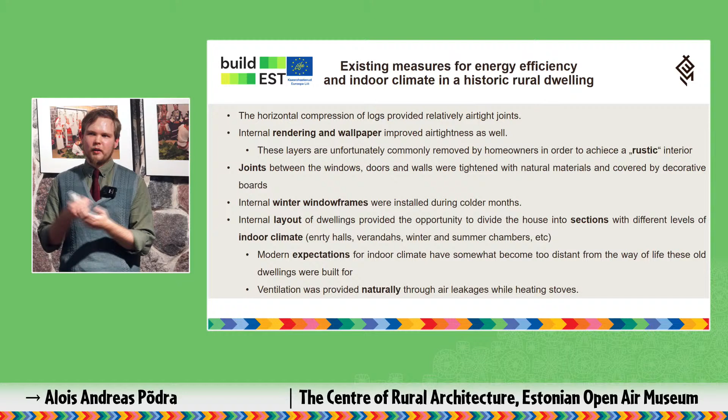You have winter and summer rooms - rooms you heat during the winter, and rooms you don't heat, used only during the summer months. Modern expectations for indoor climate have become somewhat distant from the way of life these old dwellings were built for. Having low temperatures on the floor, putting on woolen socks and an extra layer of sweaters was part of the way of life in these buildings.

Today's expectations are that I want to walk barefoot in the house and I want 21 degrees everywhere. There is a gray area in how appropriate such requirements in a historic house actually are.

Ventilation was provided naturally through air leakages in the windows and gaps in the doors, and it functioned thanks to heating stoves. Nowadays, when we seal the air leakages, seal the windows, and use heat pumps, we arrive at the problem that the building isn't ventilated anymore, which leads us to the requirement of using mechanical ventilation.

In terms of measured energy performance of such historical dwellings, unfortunately, even while applying passive or energy conservation measures, the energy class does not go beyond class G. Studies show that the most effective measures are insulating the external walls, installing ventilation systems with heat recovery, and improving heating systems.

Insulating the external walls is among the most controversial energy conservation measures, because there's the danger of defacing the facade with external insulation. However, we can't really get over the fact that it is among the most efficient energy conservation measures.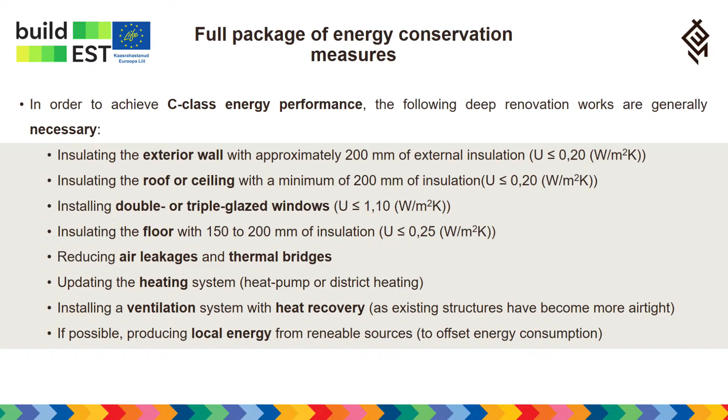On the question of internal versus external insulation, experience shows that more than 5 centimeters of interior insulation can be problematic in terms of moisture. With calculations, moisture barriers and ventilation, a little more may be possible, but the 200 millimeters generally needed for the required energy class is not possible when insulating the interior. However, external insulation is safe in terms of condensation, mold, and bacterial and fungal growth.

There have been studies on actually listed or protected buildings exploring whether we can maintain the building's pre-renovation proportions while adding insulation evenly throughout the dwelling. For an example building in Võru, they achieved this - the external silhouette remained exactly the same, although the added insulation thicknesses reached the required amount. This shows that if it works on listed buildings, there's potential to apply it to unlisted buildings as well. However, we can't underestimate the cost of such a renovation project.

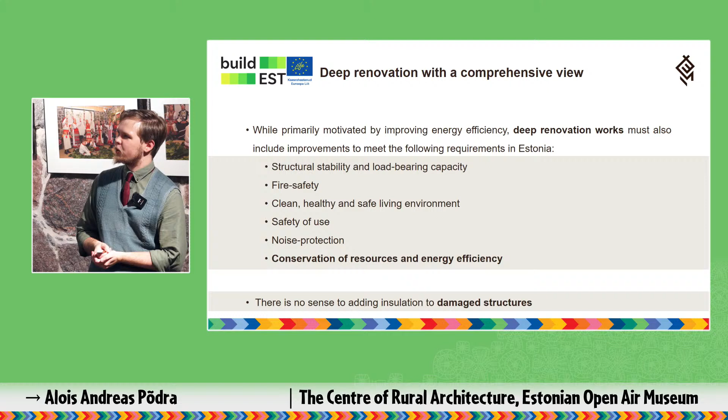Renovation works, while motivated by raising energy performance, must also include improvements to meet other requirements in Estonia: structural stability and load bearing capacity, fire safety, a clean, healthy and safe living environment, safety of use, noise protection, and conservation of resources and energy efficiency. Works on energy efficiency should ensure the renovated structure or dwelling as a whole also meets these requirements, which makes the renovation project even more complicated.

The main idea is that there's no sense in adding insulation to damaged structures, which means we also need insights into the technical condition of the housing stock in Estonia before we talk about any energy conservation measures and adding insulation.

So we have done several studies in Estonia to explore this question, to understand what the homeowners are doing currently, what they have been doing, what they are planning to do, and what their mindset is. I will be introducing roughly three studies, or different aspects of each study.

The first study used a fieldwork method where a number of buildings in the Esna and Kareda region in Estonia were inventoried. There were two types of buildings generally: log houses built between 1900 and 1939, and Soviet-era, more modernized architecture from the 1970s to 1980s built from aerated concrete. So we had two different building typologies that we were able to compare.

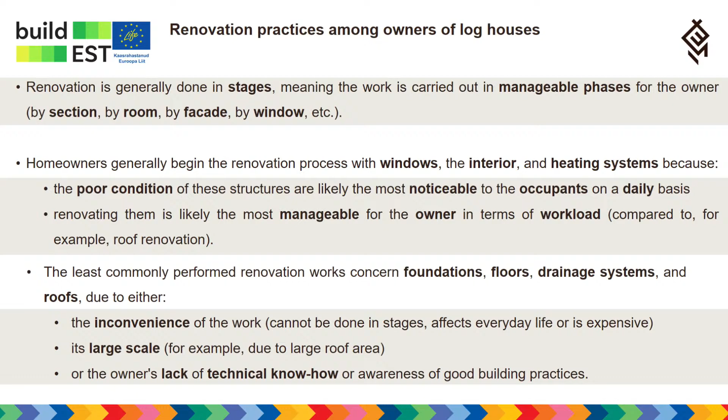However, we know that the actual energy savings from renovating a window are not that noticeable. In terms of thermal comfort, sure, you might have less draft during winter, but in terms of total energy performance it might not be that great. It depends on the building, how much window area it has, how poor the original windows are, but it is not among the most efficient energy conservation measures.

And doing the interior is just aesthetics, basically. While foundations, floors, and roofs are the least done, the work is likely very inconvenient. You can't really replace a roof in stages—well, you can, but it's difficult. Renovating floors is similar: you can't really live in the room if you need to replace it. If you don't have enough space for the family to move out of one room and into another, it might not be possible to renovate the floor.

There's also the owner's lack of technical know-how or awareness of good building practices. There's very much a culture of self-building, or consulting relatives, friends, neighbors, and building forums online about which energy renovation measures are proper and which materials to use. There aren't really that many trustworthy technical information sources available today in Estonia—we are improving that—but a lack of technical know-how is definitely an issue.

When looking at the average condition of these structures, you may notice that some structures are not present due to a technical oversight. Some of these structures were simply not inventoried due to human error, but they were evaluated with a score of 0 to 5, 5 being very good, 0 being critical state, needs immediate renovation. We can see that the average condition ranged from satisfactory to good. No structures are perfect, let's say.

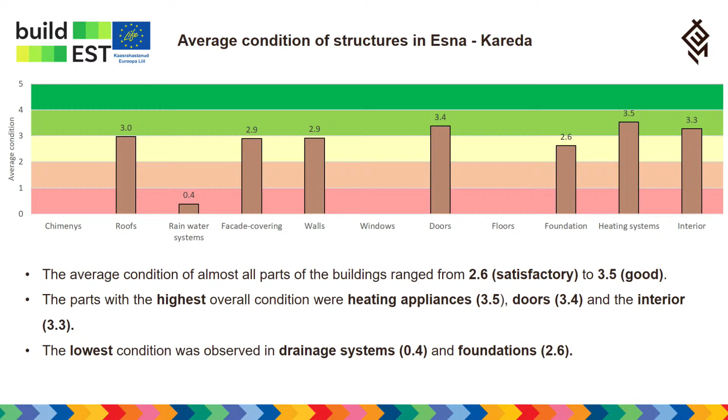So the building was renovated, but as a complete whole the heating method of the building was poor, because for example if the air-to-air heat pump fails due to an electrical shortage during the wintertime, that building has no backup anymore. So that is likely what is going on here with why renovated heating systems were not in an optimal condition.

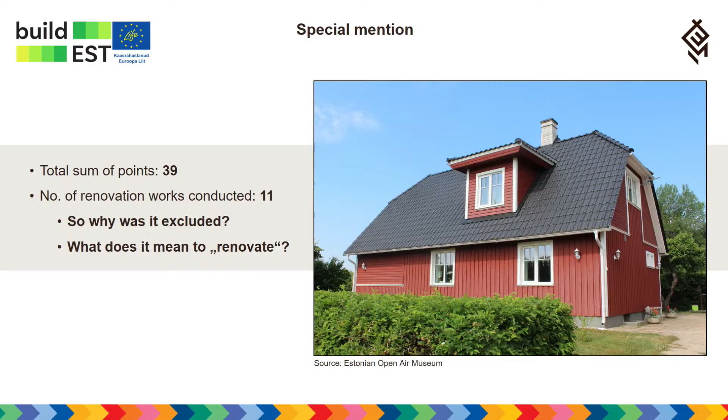This special mention had the highest score, the highest number of renovation works, but it was excluded from the sample. Why? Discussions with this owner revealed that they said they renovated, they improved all the structures, but later it came out that for them renovation meant demolishing the entire thing down to the foundation and building a replica. So technically we can't call this a renovation, but this is how certain homeowners interpret the renovation, basically.

We can see this also among developers and people who have the finances to build an entirely new building: renovating faulty structures and then improving their energy performance and architectural appearance, the cost becomes so great that demolishing the structure becomes easier. Again it comes down to maintenance, because in terms of total cost, if the building is not maintained, if you need to make improvements everywhere, then this scenario becomes far more likely for the homeowner. And this is not what we're actually looking for in the renovation wave.

In Esna-Kareda, we also looked at the amount of preservation of cultural heritage, inventorying surviving original material, the form and massing of the building, and the architectural details. We noticed that in terms of material and the form of the building, it was relatively okay. However, details are the most vulnerable of these three categories, because they're the easiest to remove, the easiest to replace, and the least likely to be placed back onto the facade once external insulation has been added.

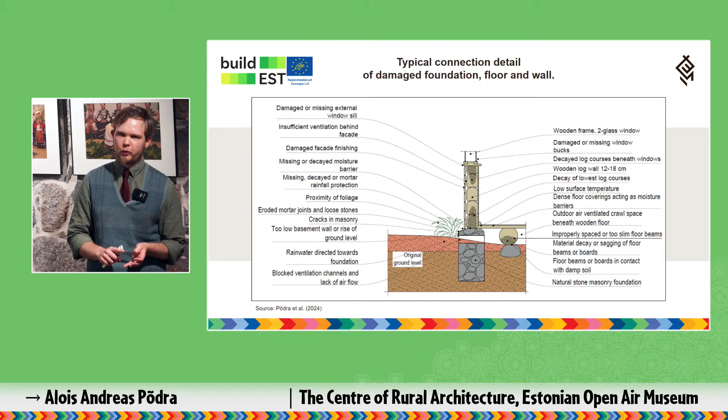The potential for damage transfer was very, very high. A damaged windowsill leads to a damaged log wall. A leak in the roof leads to a damaged roof rafter, then a damaged ceiling beam, then a damaged floor, etc.

Even small things, like foliage against the foundation or a ground level that has risen over the decades, lead to problems under the floor and in the log wall, increasing the investment the homeowner will need for renovation. We can talk about insulation, but all these potential damages from maintenance issues will also need to be fixed during the renovation, increasing the original investment and making the process exponentially more difficult for homeowners.

In a third study, in terms of heritage, we wanted to see how homeowners view their own situation—what is their motivation to renovate, how they have renovated their houses, etc. That study is very much related to Petra's presentation of the study we did with Kantar Emor.

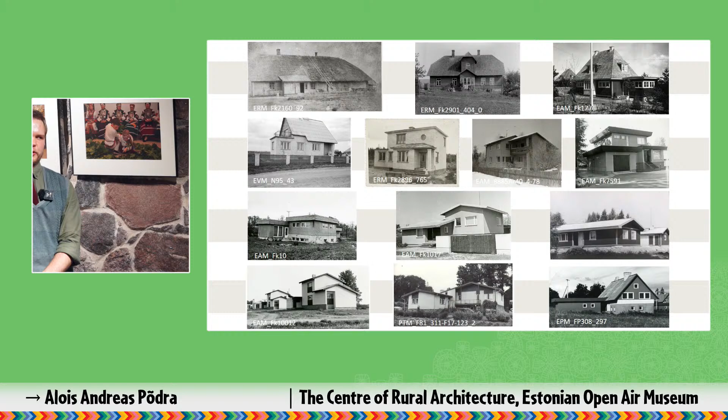Looking to the future, briefly - we've spoken about wooden early 20th century architectural heritage, but we've also started looking at the Soviet period. We have certain milieu value areas where Soviet-era detached housing has been declared somewhat protected. As time goes on, I believe this line comes closer to us. Right now our attention might be on this type of architecture, but I pose the question: when does this type of architecture begin to be viewed as needing or deserving protection? And on it goes until we end up in the 1990s. Not today - this will probably be left to the next generation to decide, but we need to understand that our actions in the renovation wave will impact how future generations are able to conserve what they interpret as architecture, as cultural heritage to them. There is some danger that we are making a decision for them that they might not be able to overturn if they see fit.

Some words about the BuildEST project. The Open Air Museum is part of two work packages: developing technical solutions and information material for both homeowners and specialists. Part of this work package involves studying the detached housing stock, establishing the extent of existing renovation works and their quality, establishing common damages and renovation mistakes, and establishing best renovation practices, as well as raising awareness among homeowners and specialists through events such as this one. But more on work package 2 - the previous studies I showed were all part of that work package.

When developing these technical solutions, I've provided several principles that might potentially be taken into account. For example: primarily focusing on external insulation or replacing old insulation with more efficient materials; maintaining architectural proportions according to building type, regardless of whether it's protected now or whether we see potential that it might deserve preservation; preserving historical details or trying to nudge the construction market to make it easier for homeowners to produce or find replicas; and recommending the use of durable and accessible renovation solutions while ensuring it's also historically appropriate to the building type and original construction material.

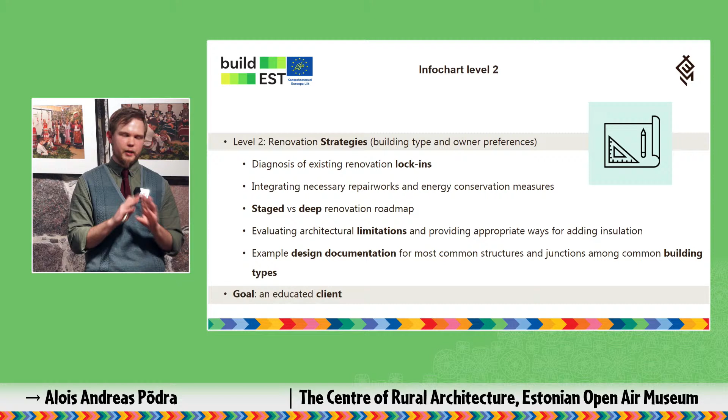However, if it's aimed at specialists, they can skip the first level, and we have level 2. These are renovation strategies by building type and by owner preferences - specific renovation junctions and drawings that begin at an elementary level, saying okay, we add insulation to the roof, we add it to the wall, and then do you have any lock-in effects?

Let's say that the roof covering is already renovated, you can't really remove it anymore, so you need to add the insulation from indoors, or whether that might not be possible. How to establish what are your limitations, what is your renovation motivation, and which solutions are most appropriate.

So this would give you an educated client. They already know how to speak, they already know where to place insulation, whether it's external or internal, which kinds of solutions they need, and they can already discuss with designers.

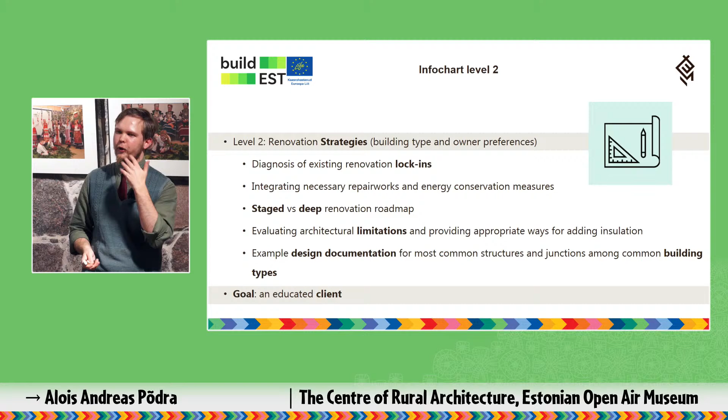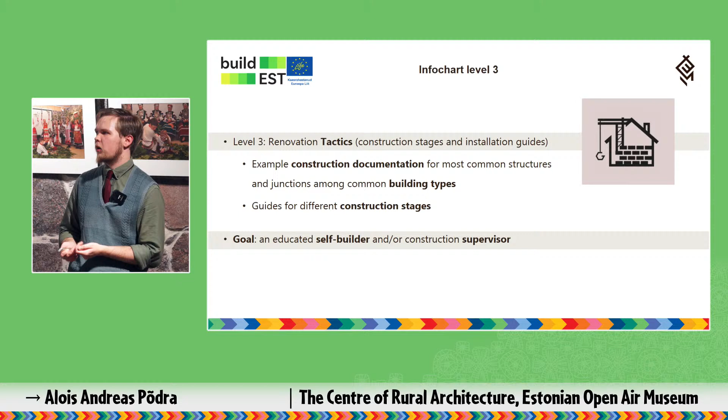And level 3, renovation tactics. Example construction documentation for common structures and junctions among common building types. Now this says exactly in which order to place any materials, how to provide air tightness, how to install the different measures.

This is more aimed at the self-builder, or let's say to give the homeowner a potential of being able to act as a construction supervisor, to understand what the builders are doing, even if they themselves are not doing it.

And in the end, all of this hopefully might end up as part of the Building Renovation Passport, which is a concept recommended by the European Commission, where existing energy performance certificates are developed into this sort of logbook and roadmap, potentially an online module where building data is stored in the logbook, and then this provides a basis for establishing the renovation roadmap with exact renovation stages.

What is the priority of each work? What is the size of the investment? Which solutions to use in which stages, etc. And this is slowly in development, but this is the future where renovation advice hopefully will end up in Estonia. Thank you.

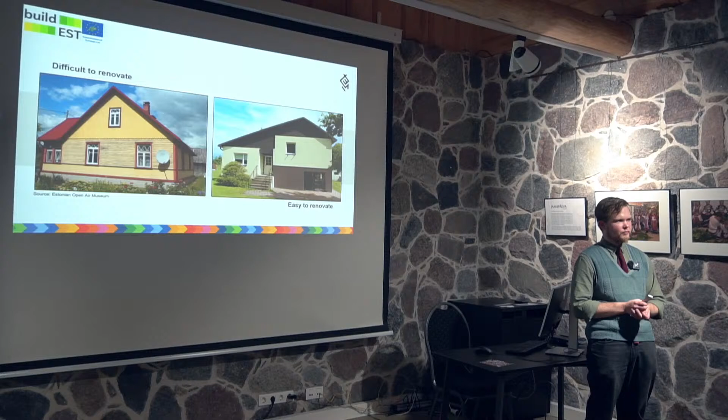We did a study - there it is - about changes in detached houses, and we saw that the modern buildings were actually more difficult to renovate without losing their original character than the buildings from the 1910s, 20s and so on. When you come into this functionalist architecture, it's much easier to destroy the character of the building than the older ones, which can be changed much more before you see it. So I thought that was really interesting, and I wanted to ask if you've thought about that in your study.

I understand, yeah, I see what you mean.

I think it all goes down to building type and architectural style. Sure, with 30s functionalist architecture, the question of proportion and balance is much more subtle and much easier to ruin. However, buildings like this example are something a bit different, because this is a mass-produced dwelling. Renovating this is somewhat closer to renovating a concrete block apartment building in Estonia - you can copy-paste solutions much easier compared to a dwelling that needs a more tailored approach. So what you're describing is placed somewhat in the middle, perhaps.